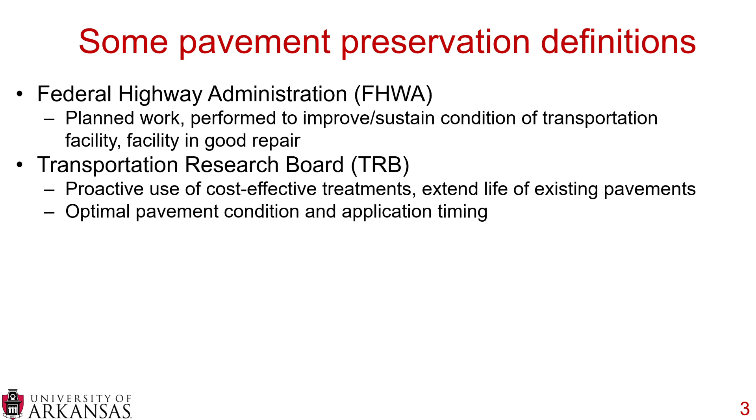Finally, the National Center for Pavement Preservation, NCPP, defines pavement preservation as a network-level, long-term strategy that enhances pavement performance. It is an integrated, cost-effective set of practices that extends the pavement life, improves safety, and meets the road users' expectations.

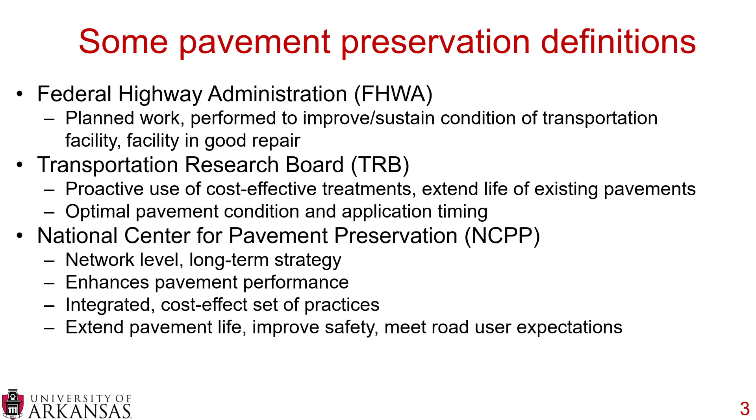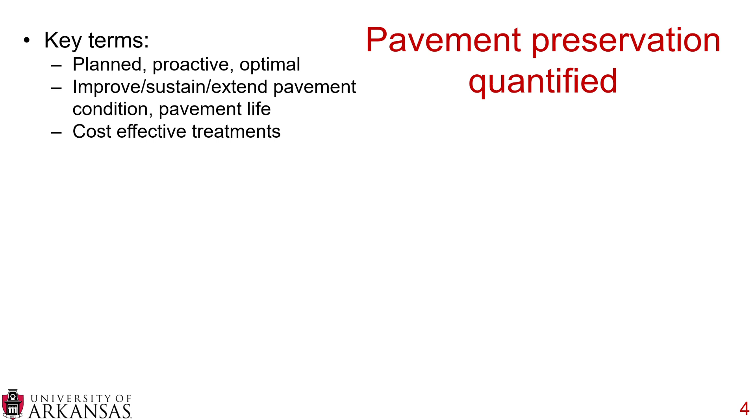Now, some key terms that we saw on that previous slide were planned, proactive, and optimal, improving, sustaining, extending the pavement condition and pavement life, and cost-effective treatments. But you can see all of these are qualifications, not quantifications.

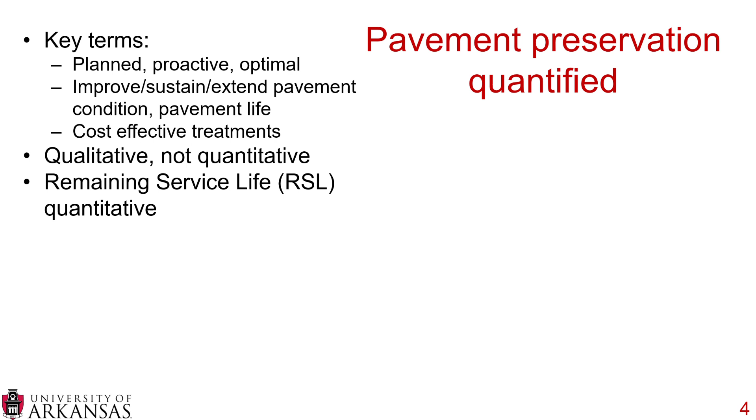Now, there is a quantification out there called remaining service life, or RSL, and this is one of my favorite units. There is the calculation for remaining service life, but a way to describe remaining service life is by using its units, lane mile years.

So let's pretend your network has one lane mile, so it's 12 feet wide by 5280 feet long. If you don't do anything to that road, if you let that one lane mile sit, for 1 year you have a 1 lane mile year loss, which means your network is decreasing in quality.

Now let's say you have that 1 lane mile, but you put some sort of 4-year preservation, 4-year maintenance, or 4-year rehabilitation treatment on there. After 1 year, you actually have a 3 lane mile year gain. So the point of this is if you're improving your network by placing treatments on the road that extend the life, in theory, your remaining service life would be going up across your entire network.

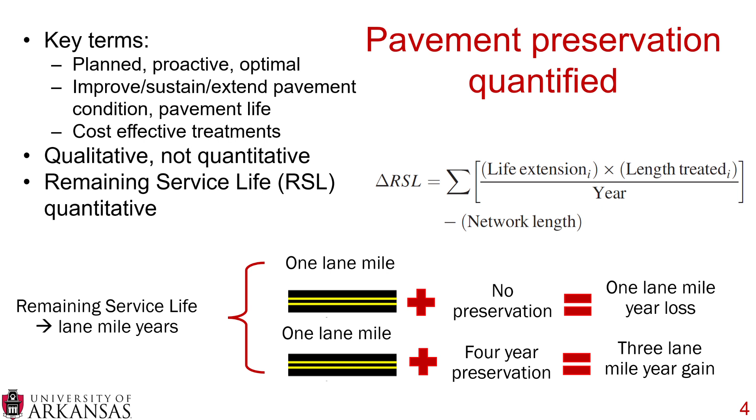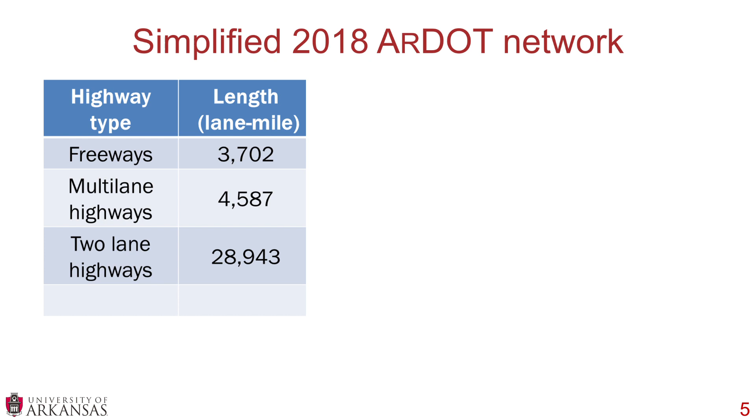So what Dr. Casillas did is she simplified the 2018 ARDOT network. We simplified it into freeways, multi-lane highways, and 2-lane highways. We also found the average traffic on each of these highway types.

You can see this is a very typical phenomenon where we have very few lane miles of freeways, but that is where the vast majority of the traffic is. And you can see we have a lot of 2-lane highways in the state of Arkansas with relatively little traffic.

But in a way to try and normalize that, we can use vehicle miles traveled, or VMT. You can see this phenomenon, this unit, somewhat normalizes both the length and the traffic. It kind of weights both length and traffic in order to get an idea of where your vehicles are on the roads.

Now what we did is we took ARDOT's $237 million 2018 budget and we established the budget as a percentage of VMT. Right now, the majority of money is spent on the freeways and multi-lane highways, and quite a small amount compared especially to the lane miles is spent on two-lane highways.

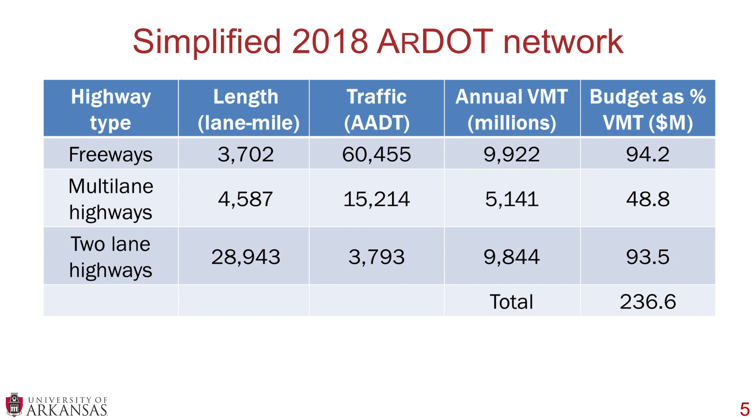But by using VMT as our guide, we can normalize and take into account both the length and the traffic of each of these highway types. Now, ARDOT sent us, I believe, 7 different highway types, so of course there were assumptions made to reduce that down to 3.

For a class project, 3 highway types is much better than 7, because after a couple it's just rinse and repeat. We also needed to make some simplifications for lane mile length and traffic, since traffic isn't the same on every 2-lane highway. There were some assumptions, and this is what we came up with.

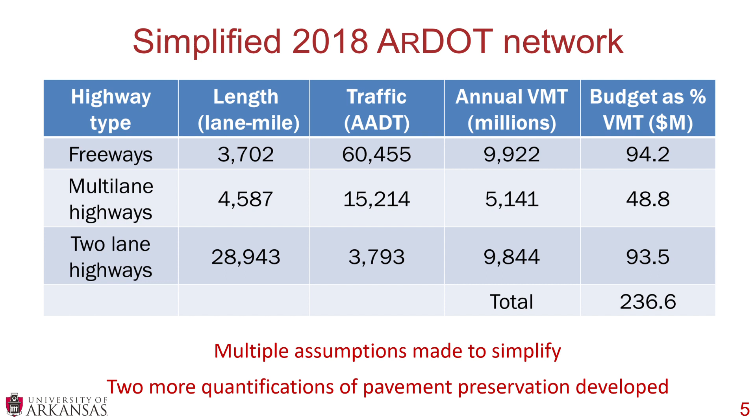More importantly, we developed 2 more quantifications for pavement preservation. One was existing service life, or ESL, which represents the amount of time pavements have been in service. You multiply the age of the pavement in each PCI category by the length in network. For example, for PCI A we assumed the year range is 0 to 12, so a newly built road stays in that PCI range for the first 12 years, and we used an average age of 6 years.

On freeways, Arkansas had 1,166 lane miles of freeway in PCI A condition. You multiply that by 6 and get just under 7,000 lane mile years for your ESL. You can see here the 5 different PCI grades, A, B, C, D, and F, the approximate year ranges these occur in, the average life within those year ranges, the associated freeway length in lane miles, and the corresponding freeway ESL.

I want to note, ARDOT no longer uses the PCI grading system. They're now on the MAP 21 system, but this is a nice tool to have available because we used the website roadresource.org. This is how you calculate the ESL: basically the average life times the length in the network at that condition. So we have our freeway ESL here, and we could do the same for our multi-lane and our 2-lane.

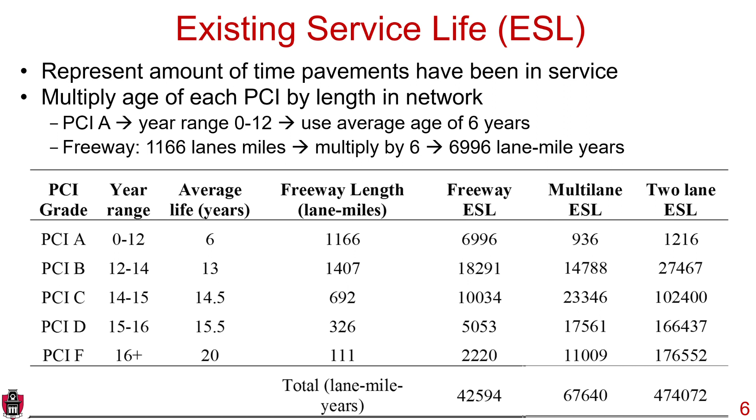Now the second quantification is what we call the length of time to reach true pavement preservation, or T-Pres. We put true in quotes because this is a new unit we developed. T-Pres is the existing service life divided by the remaining service life. We define true pavement preservation as your entire network being in PCI A and B, essentially very good or good condition. This is very important: you have 0 net lane mile years RSL.

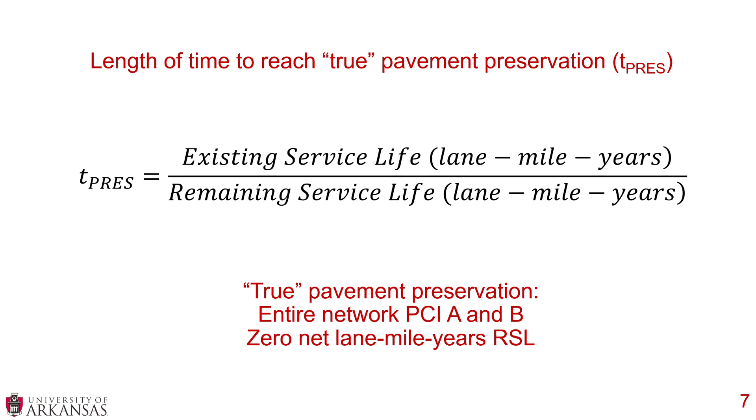Previously I mentioned a positive RSL is good because that means your network overall is becoming a better condition. Our premise, however, is that if your entire network is already in good condition, you don't need to raise it, so you don't need a positive RSL. You don't want it to go down either, so you don't want a negative RSL. If you can get your entire network into PCI A and B condition, your RSL can be 0 and you will be content.

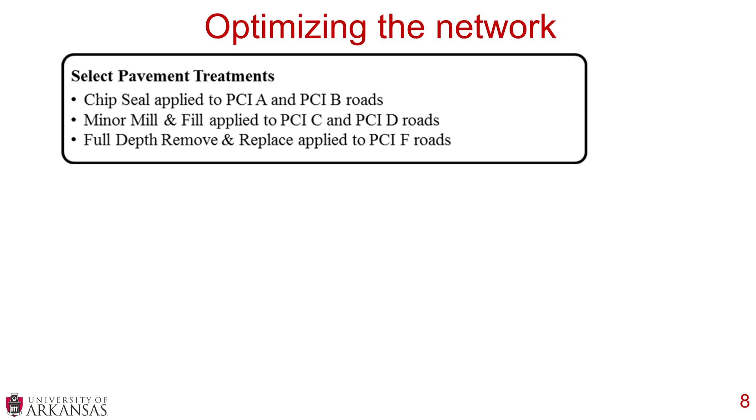So how did we optimize the network for this project? First we selected the pavement treatments, using the typical ARDOT pavement treatments. By far the most common are chip seals, minor mill and fills, and full depth remove and replace. We applied chip seals to PCI A and B roads, minor mill and fill to PCI C and D roads, and full depth remove and replace to PCI F roads.

Then we utilized the RSL calculator, the remaining service life calculator, on roadresource.org. If you have not been to roadresource.org, I encourage you to finish watching this video and then immediately go check it out. It is a fantastic website.

What we did is we treated the same percentage of PCI D and F roads, meaning we spent time on those roads in bad condition that need to be brought up. But this is very important: we treated 100% of the PCI A roads, keeping the roads already in good condition in good condition. This is absolutely critical for this to succeed. Then we simply maximized the remaining service life within ARDOT's budget.

Based on that, we determined the T-Pres and the preservation budget. We calculated the T-Pres for each highway segment using the remaining service life, ensuring that PCI D and F roads could be treated within T-Pres. Then we determined the preservation budget to keep the roads at PCI A.

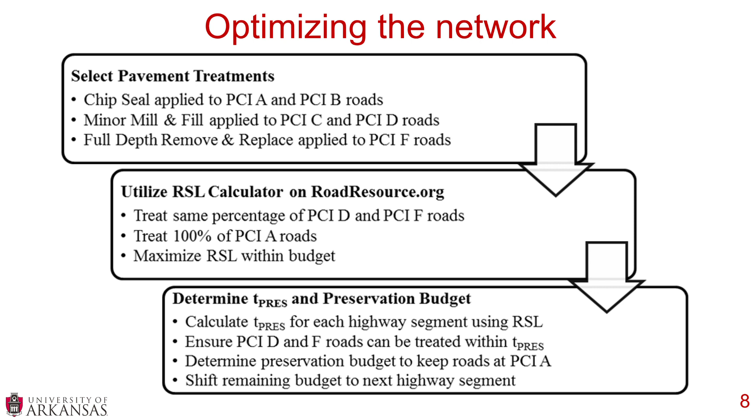We shifted the remaining budget to the next highway segment. We went over a lot of details here, and I encourage you to take a look at the full paper, because it walks you through these very clearly. This is a very important sequence to follow to get the final results.

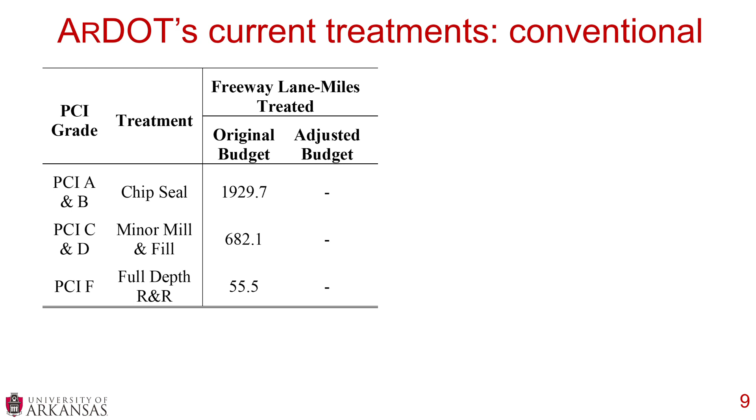Using ARDOT's current treatments, these are the conventional treatments. We put chip seals on PCI A and B, minor mill and fill on PCI C and D, and full depth remove and replace on PCI F. You can see this is the original budget for freeway lane miles treated.

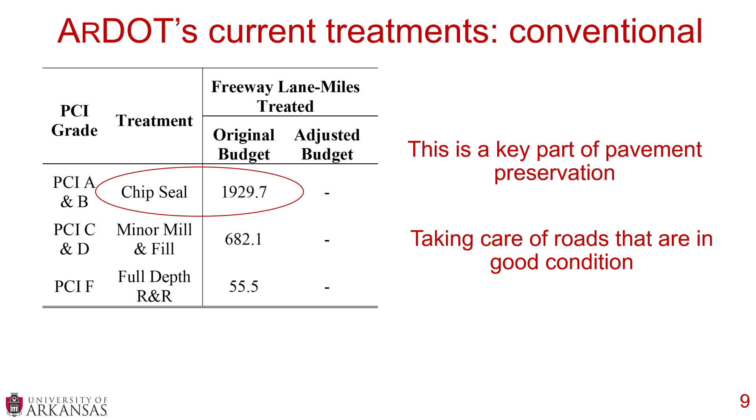Note how we are taking care of our roads in good condition. We are putting chip seals down on the PCI A and B roads, taking care of those roads that are in good condition. We did the same thing for both multi-lane and two-lane treatments.

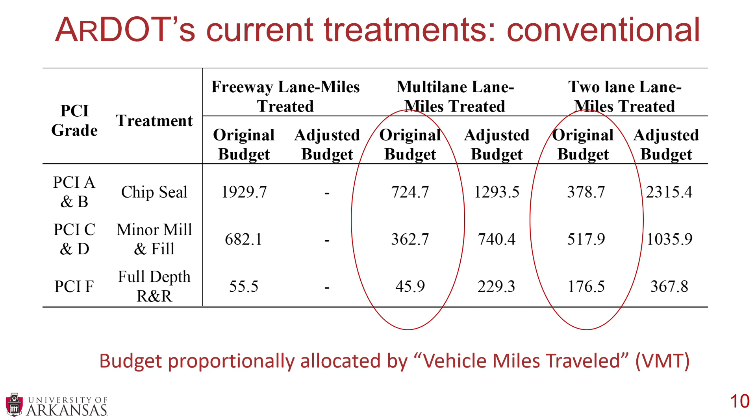After we took care of our roads in good condition, once our freeways were in PCI A and B, we took the remaining money and shifted it down to multi-lane. Once the multi-lane was in PCI A and B, we shifted the budget down to two-lanes, and you can see the budget significantly increases after we shift that money down.

So we had our original budget. Once the freeways were in PCI A and B, we kept those in A and B, and shifted all the remaining budget down to multi-lane. We got that in PCI A and B, and then shifted the original budget down to two-lane. We'll go through an example of this in the upcoming slide.

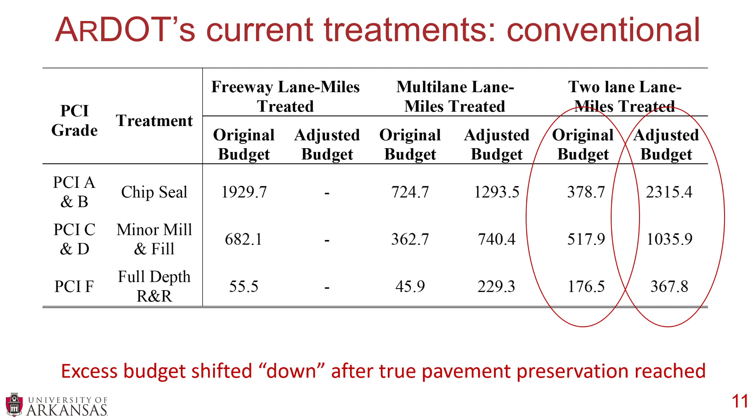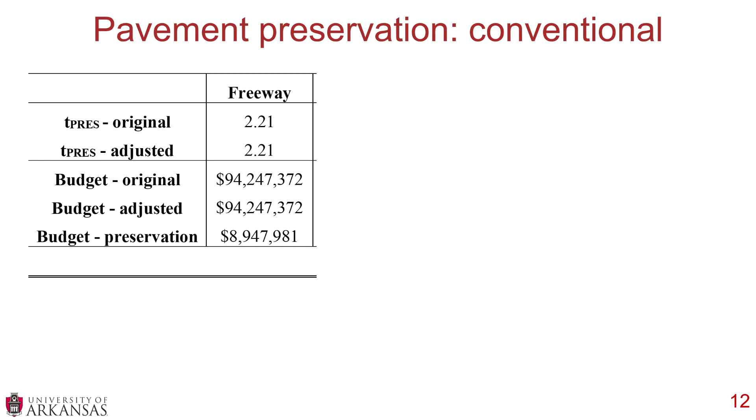We found that using the conventional treatments, it would take 2.21 years to get to T-Pres. That means it would take 2.21 years to get our freeway into PCI A and B condition using $94 million a year. The adjusted budget was also $94 million, but once we got into PCI A and B, we would only spend $8.9 million a year on the roadway.

Once your true pavement preservation was reached, you can reduce the budget significantly. This is because we're only treating PCI A and B roads, only placing chip seals down on our freeways. What we can do is shift that savings down to multi-lane highways.

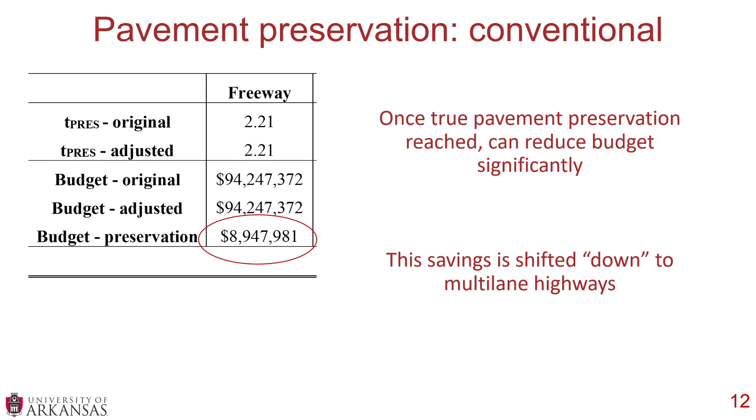So how did we do that? We adjusted the budget. You can see originally it would take 13.8 years to get to PCI A and B on multi-lane highways, but after you shift your excess budget down, it only takes 3.97 years.

Let's walk through this adjusted budget. The first thing you do is take that $94.2 million and subtract the $8.9 million, then add that difference onto the $48.8 million, giving you $134.1 million. So 94 minus 8 plus 48 gives you about $134 million of your new budget.

As I mentioned, because you add to your budget, going from $48.8 million to $134.1 million, you can take care of a lot more roads a lot more quickly, decreasing your T-Pres. Then once you're in PCI A and B with your multi-lane, and your freeways are already sitting in PCI A and B, once your multi-lane's in PCI A and B, it only takes $11.1 million.

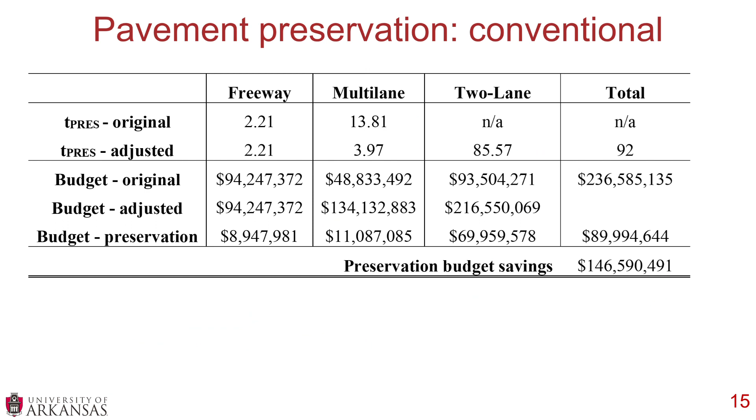So you can shift all your budget down to two-lanes. You can increase your budget from $93.5 million for two-lanes to $216.5 million for two-lanes.

What's important is, if we just kept our original budget of $93.5 million, it is not possible using the conventional treatments to get to T-Pres with our two-lane highways. This is what states are facing. They have a lot of two-lane roads that are not in good condition, and the way they currently take care of these roads, they literally cannot keep up. It is not possible, and our data shows that.

But what our data also shows is that when you adjust the budget, if you get your freeways in PCI A, if you take care of those roads in good condition, in theory they will not get into the heavier rehabilitation needs. It costs a lot less money to keep a road in good condition. So if we can keep our freeways in good condition and have them stay that way, and take our multi-lane highways and get them in good condition and keep them there, we can put all that money into our two-lane roads.

And the good news is within 86 years, our two-lane roads can be in A and B condition. For a total of 92 years to get our entire pavement network in good condition, that is a big order, and a time scale people are often not terribly comfortable with. But the beauty of this is with our existing budget, it's actually possible to do. It'll take a long time, but it's possible.

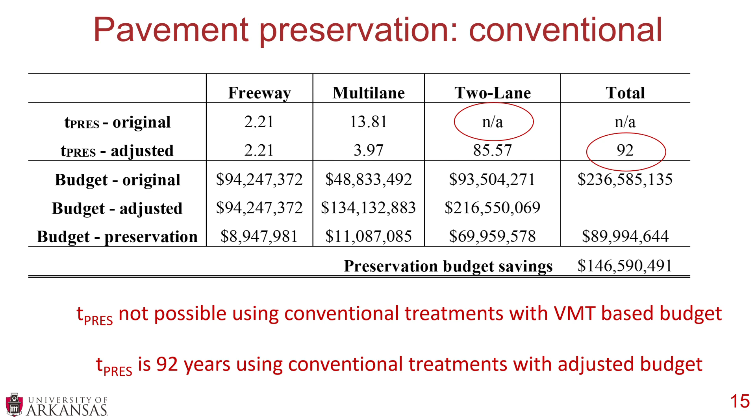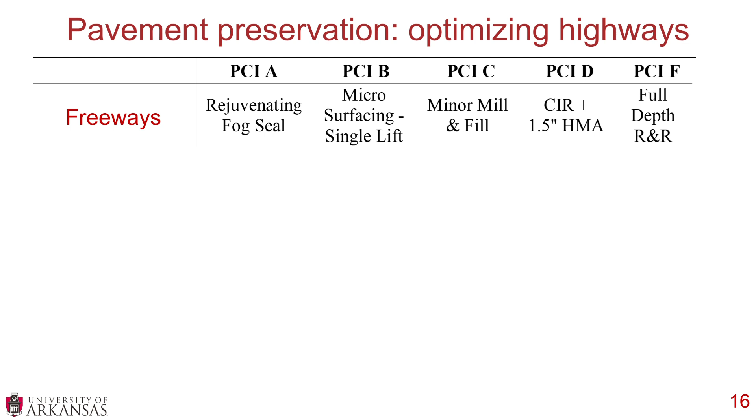Now, that is not terribly realistic. I don't recommend putting chip seals down on freeways, but these are ARDOT's conventional treatments - this is what they use far and away most commonly. So what we did is in the classroom, Sadie asked the class to break into groups and optimize their treatments. For freeways, the most optimal treatments found by harvesting data from the class were rejuvenating fog seals, microsurfacing, minor mill and fill, cold in place recycling, and full depth remove and replace.

For multi-lane, it's very similar - you see some scrub seal, a little more CIR, and some full depth reclamation getting in there. And then for two-lane highways, again quite similar: rejuvenating fog seals and chip seals, cold in place recycling either with chip seals or hot mix asphalt, and then full depth reclamation with 4 inches of asphalt.

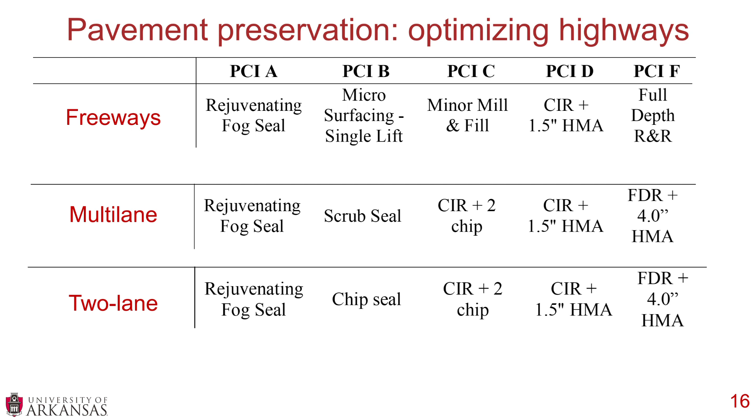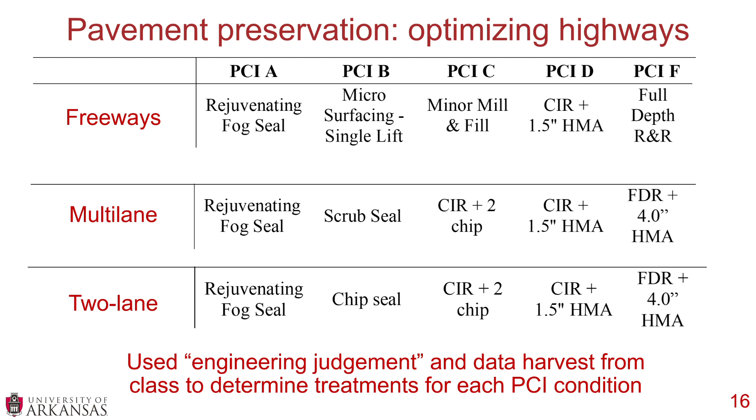Now again, we chose these treatments - these 5 treatments for each of the 3 freeway or highway types - by using both data harvested from class and some engineering judgment as well. So there were some that had slightly better performance, but we did use engineering judgment. And again, the paper goes into all these details.

It's still a long way out there, but if you can get all your freeways and multi-lane highways into A and B condition in 5 years and keep those in good condition, people aren't going to mind if you start putting that money toward two-lane roads, and eventually your entire network will be in A and B condition.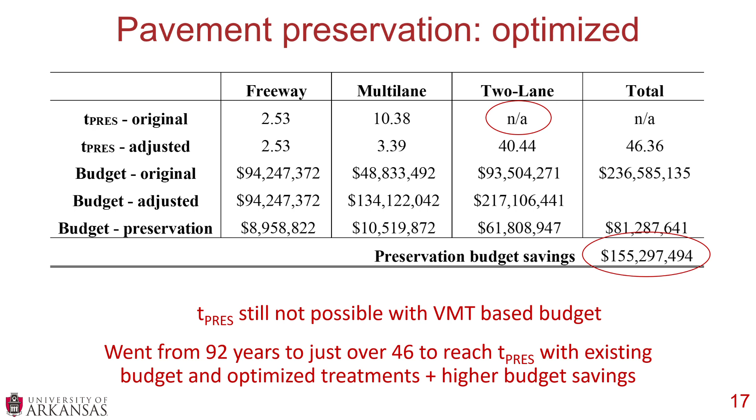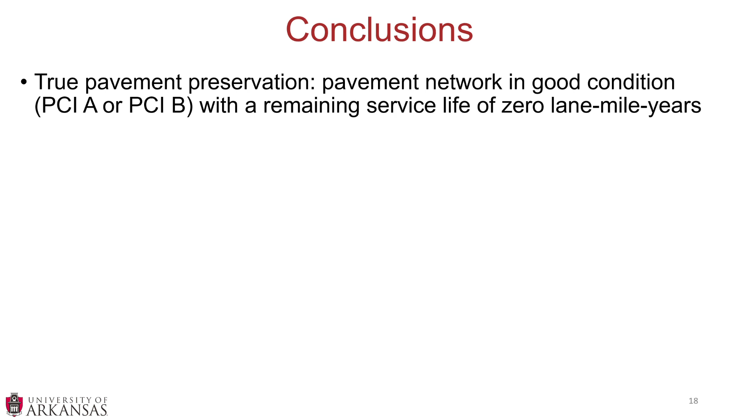So some conclusions: we defined what we call true pavement preservation, which is your pavement network in good condition, PCI A or B, with the remaining service life of 0 lane mile years. If ARDOT used conventional treatments and the current budgets, we could reach true pavement preservation in 92 years, and we would save $146 million a year at that 92-year mark.

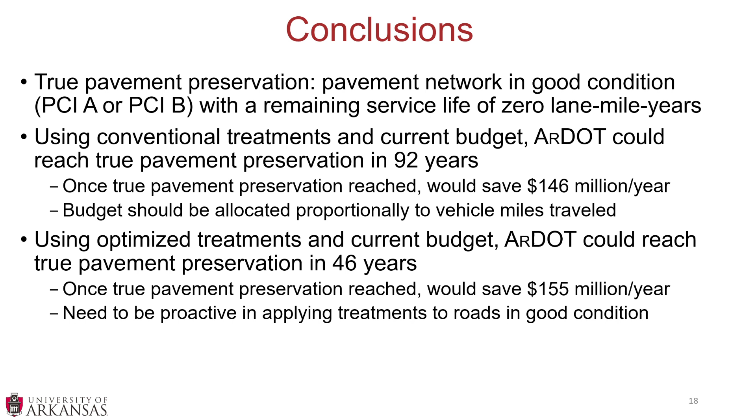But the budget should be allocated proportionally to vehicle miles traveled. Using optimized treatments, ARDOT could reach true pavement preservation in 46 years, and we'd save $155 million. But very, very important here is you need to be proactive in applying treatments to roads in good condition - you need to take care of the roads in good condition.